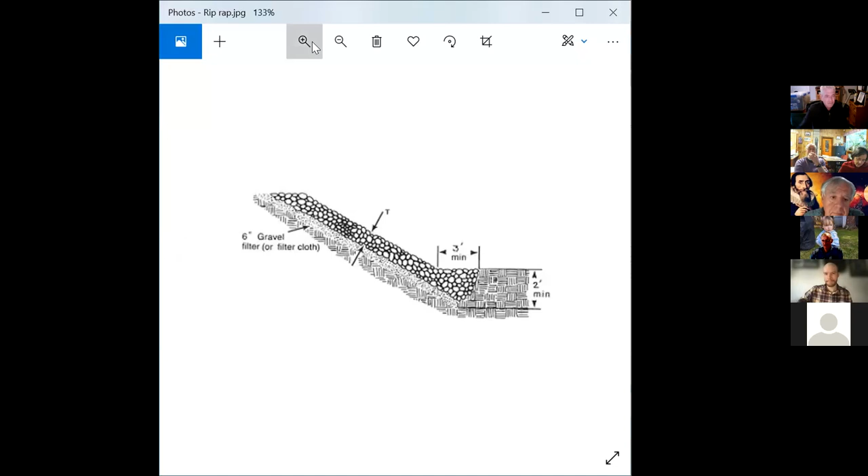No, I'm letting the other person in, but... There you go, there you go, Frank. Frank's in. All righty, thank you. Thank you all, thank you folks.

So if you can see that, and I'm going to make my screen bigger. So I went through, there's a bunch of different standard details for riprap slopes.

Again, some of the details vary, but typically you've got your soil, the little crosshatch. Then there's often a filter fabric or geotextile fabric to make sure that the fine material behind it doesn't erode out and undermine the riprap. You usually put in some kind of gravel or crushed stone, and then you have the riprap. Again, there is an embedment here, and this detail shows 2 feet and a little bit of flat area.

The system that was built was basically just laid upon the slope, ties into the existing grade down at the bottom, so it's not embedded at all. And there's really nothing behind the stone. It's large stone, but there's nothing behind the large stone to hold things in.

The second item is when I looked at the geo report, they had some nice pictures, and I think there were also some in the notice of intent. There are large holes in that riprap, and the real concern is water, whether it infiltrates down from the top as it's coming from the slope or through the ground, can take that fine material out, and over time the material supporting the rock does not stay in place, and the rocks start falling down.

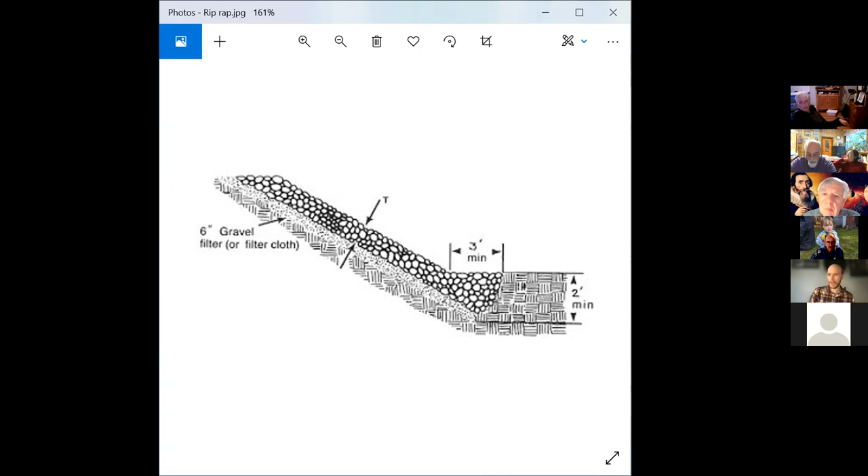Is someone able to share that plan, or could I share it? I'd like to walk through Frank's comments and make sure I understand what's needed here, because that would really help expedite this, and hopefully we can finish in just a few minutes.

Can you let the people in the waiting room in? And you are? Who are you? Mr. Salamander, who are you? No, I don't think I'm going to let Slurp in at this time. I'm going to have to make you the co-host, Mark. All right, okay? I promise not to do anything except share. I got it, we can trust you.

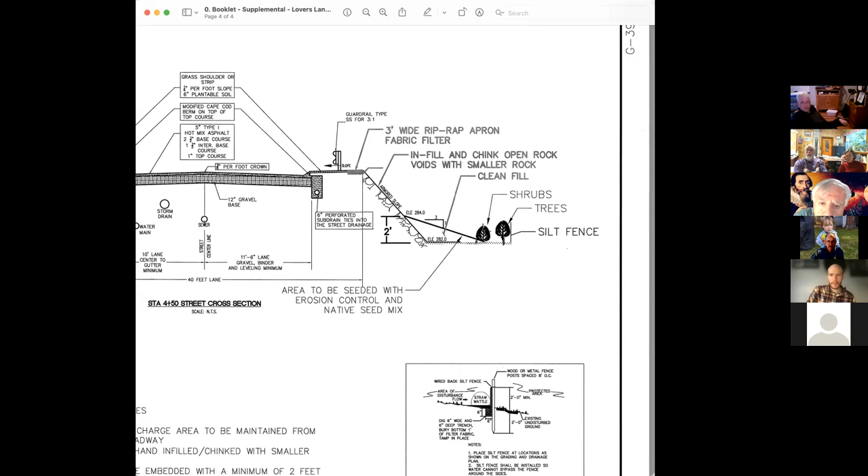So this is the site plan that was submitted to the commission on March 11th. Sorry, let's make this a little bigger. So it's stamped March 4th, 2022.

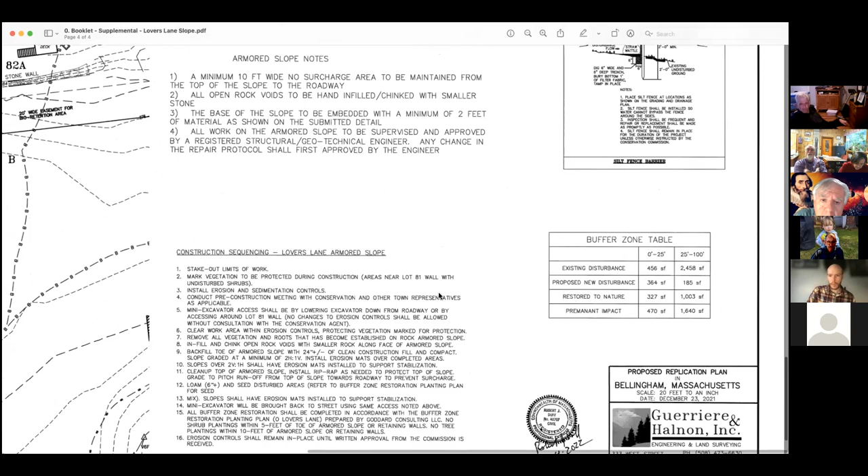The first comment was that there's no fabric behind the slope, which is correct. At least to our knowledge, there isn't any fabric behind the slope. The only way to add fabric behind the slope would be to rebuild it completely. The intention with regards to the voids between the stones was to infill and chink the open rock voids with smaller rocks, packing them in to basically fill them in and prevent them from being void spaces, probably packing them in slightly with a machine so they're nice and tight and fill the void.

We could put fabric behind those packed stones to at least create small areas that have fabric behind them, to create a seal in those areas. But if the concern is that they need fabric behind the entire slope, then the slope would have to be completely rebuilt. If that's what is requested, I can talk with the applicant about how we want to proceed. But I want to be clear about that.

This plan does show embedment of at least 2 feet with a 3-to-1 slope at the bottom. That means the bottom stones will be embedded at least 2 feet. I'm not sure if that's a concern or not, but that's what this detail shows.

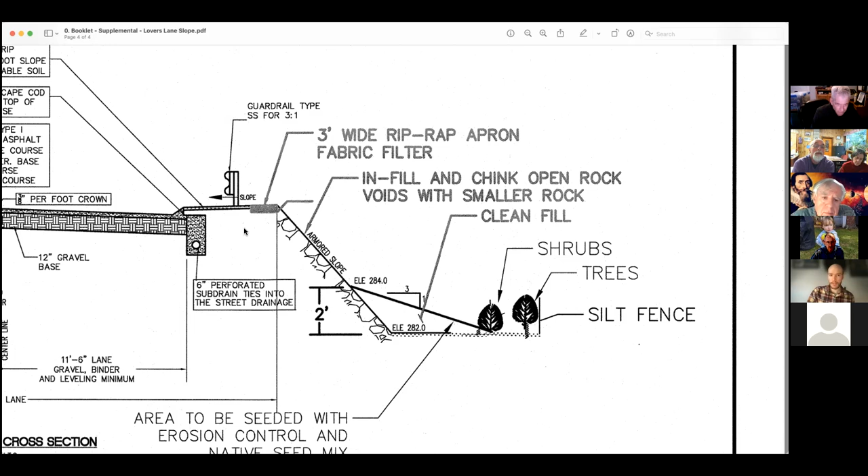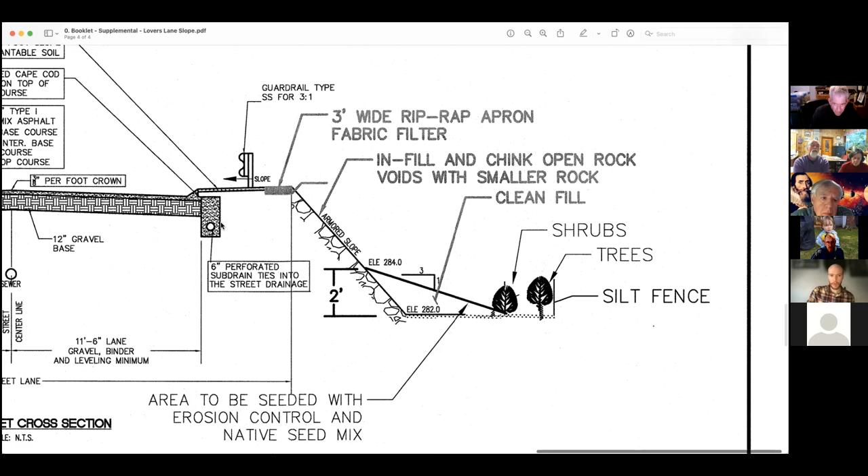So we're talking about that much area of surface water that could percolate down behind the wall. The street does have perforated subdrain tiles planned. If there was a concern about water from rainfall in this area, you could, as Frank noted, do some sort of liner to direct the water away from the wall, maybe into this system, by scooping out a curved section of soil from the stone down to the actual pipe as a liner. That way, all the water would eventually percolate into this system. You could do that, it would at least eliminate some water there. These are on both sides of the street, for underground drainage versus water on the asphalt. Water on the asphalt will go to the catch basin at the end of Lover's Lane because of the curbing.

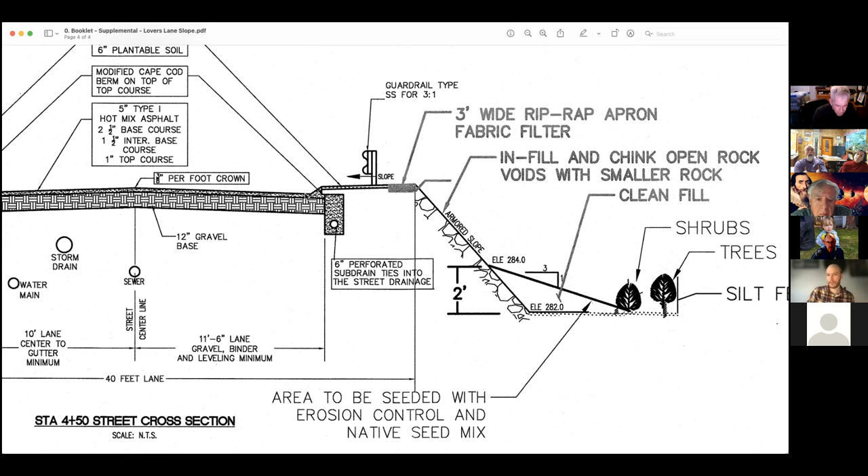On the question of water behind the wall, there's really no possibility to put a pipe underneath or behind this wall unless you rebuild it completely. So with those notes, Frank, could you clarify the concerns? I understand their concerns, and I want to make sure we do something amenable and workable that the town will allow. We're under the town's pleasure with regards to the slope, because the town wants to ensure the slope is stable long term and maintainable. So regarding the fabric, the large stones, the embedment, and the water, could you clarify your thoughts after me walking you through this plan?

Sure, I'll start at the top and work my way down. So one of the details I've seen... Sorry, what I'm wondering—similar to what I was saying—is to excavate behind the wall and create some kind of sump to take surface water and channel it away from the wall.

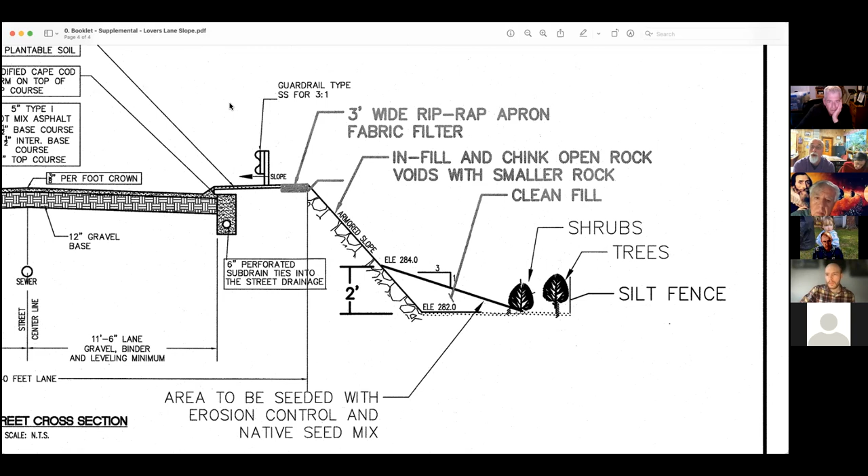So I like the thought process here, but we have two more hearings we need to get to, both continuations, and one's an open and close. So if you'll bear with me, I'd like to continue this for probably another 10 or 15 minutes. Mark, is that okay with you? That's fine, I can wait. Okay, in that case I'll entertain a motion to continue the hearing until after our next two hearings.

There's a Bellingham postal officer named Chris in the waiting room.

So we have a motion and a second. By roll call: Brian, aye. Mike, aye. Neil, aye. Ariane, aye. Okay, by unanimous vote.

I don't know who the postal service person is. Who is Mr. Salamander, please? I would not let any of them in, Cliff. No, I have a problem with people. We already said you need to identify yourself and present your credentials or interests. We don't know who these people are. Appreciate their interest in the Conservation Commission, though—it's amazing, isn't it? Well, maybe it's a big night for the salamanders.

That being the case, we'll move forthwith to the Lincoln properties.

The Bellingham Conservation Commission will hold continuations of public hearings in accordance with the Mass Wetlands Protection Act, General Law Chapter 131, Section 40, and the Bellingham Wetlands Protection Bylaw, on the notice of intent for the proposed roadway mitigation along site frontage entrances to Curtis Apartments as required by Mass DOT, including installation of additional catch basins connecting to the existing system at the easterly end of the site, within the 100-foot buffer zone to bordering vegetated wetlands. The site is located at Assessors Map 51, Parcel 4, 4A, 4B, 6, 8, and at 161, 163, and 167 Mechanic Street, Bellingham. Keith Lincoln of Chapel Engineering, Marlboro, Mass, has submitted the filings on behalf of Rustian Campanelli, 1 Campanelli Drive, Braintree. The continuations will be held on the evening of Wednesday, April 27th at 7:15.

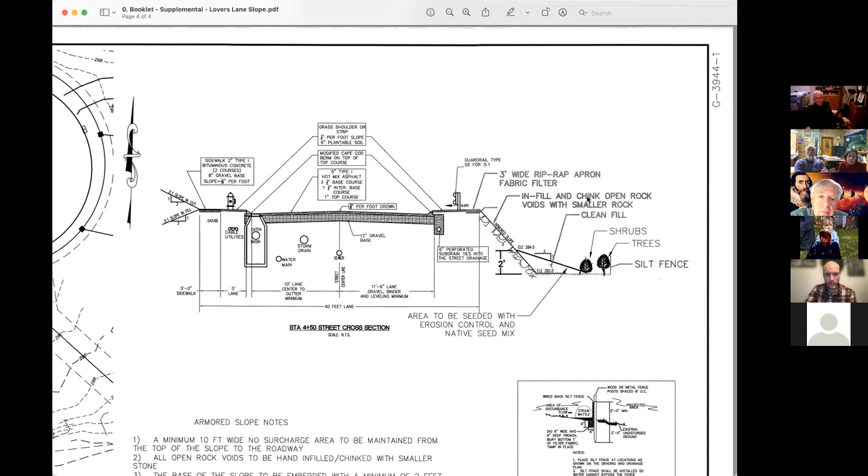If you wouldn't mind, Mark, being able to share the plan you had. I had not seen that plan previously. I don't know why, I hope I sent it. I apologize if I didn't send that out to you. I will check, sometimes things get stuck in the recycle bin or whatever. So I checked it there. The trash bin? I hope it didn't go to the trash bin. I am so sorry, I am that's so sorry.

So I think starting at the top. Junk mail filter, junk mail, thank you. I wish some of my boss's memos, but never mind, I won't go there.

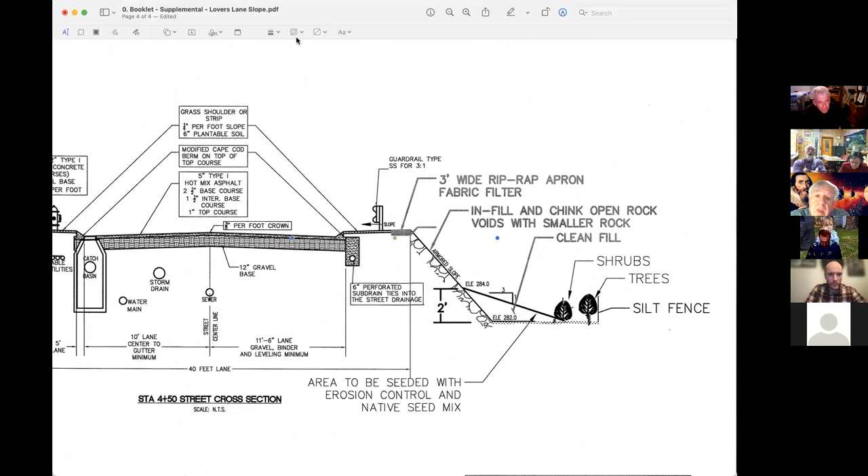Starting from the top down, I like the idea about putting the impermeable barrier across the top. One item that might be a concern, I've seen a couple details like this, wherein you run it maybe 6 inches or so below the surface, and then sort of take it around the pipe system so that water, depending how that drain is set up, it's typically got impermeable, perforated drain, something like that, so that you're basically collecting it and just running it across the surface as much as you can. I think that would be handy.

I'm not really sure how effective sort of cramming some fabric between the holes is going to be. It certainly would help, but I'm not sure that's something that's going to be very effective.

A question I might have on that is, if the rocks were put in, or the riprap was put in relatively tight, that it's being held in by more than just filled in the hole and is loose in there, that would be a little bit helpful, I think. I'm not suggesting that you remove all the riprap and rebuild the wall, to be perfectly honest. You might ask Mr. Martin if there's something that could be injected in there, put in it, that might provide some kind of a limit to water seeping through that. There may not be anything, and I don't know that.

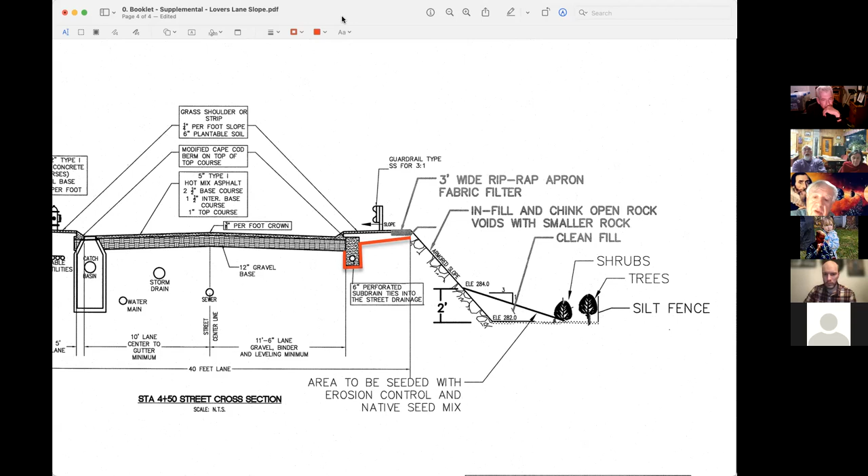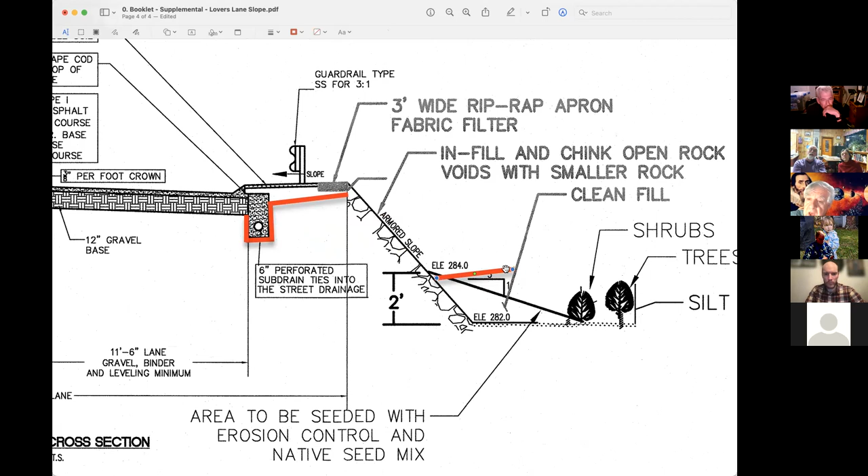The 2-foot sort of berm at the bottom, my question is, maybe some kind of fabric could be put over that, a geofabric or something, that would hold it in place a little bit on the surface and allow the grass to establish itself substantially. My concern is it's going to take a little bit of time for the grass to grow when you put that in there, unless you do hydroseed or something. But anything that might help armor that a little bit, that will allow the grass to go up there, and you'd have essentially an erosion resistant slope.

I understand you're trying to make sure you're not impacting the resource area or the 25-foot no disturb zone in there. The other question I'd have, and I see the plan, I don't know if there was another report from UTS, but would it be possible for UTS to provide the details of what's out there in their report.

This was the December 22nd, 2021 report, excuse me. They talked about how if you do this, it's going to be good. It would be nice if they could provide some information on the stability of what's out there right now. So could we anticipate it's going to fall down in 10 years, or they're saying if we do this stuff, but they're not saying what's out there is suitable.

If they had anything else that might be done - again, it's not applicable here, but I even looked at gabions. A gabion is basically a metal cage wherein you put a bunch of stone. I'm not sure how, if you tried to put a metal fabric over the top of the thing, I'm not sure how that would stay in place or that wouldn't rust away over time. But I guess it would be nice to have them take a look at it.

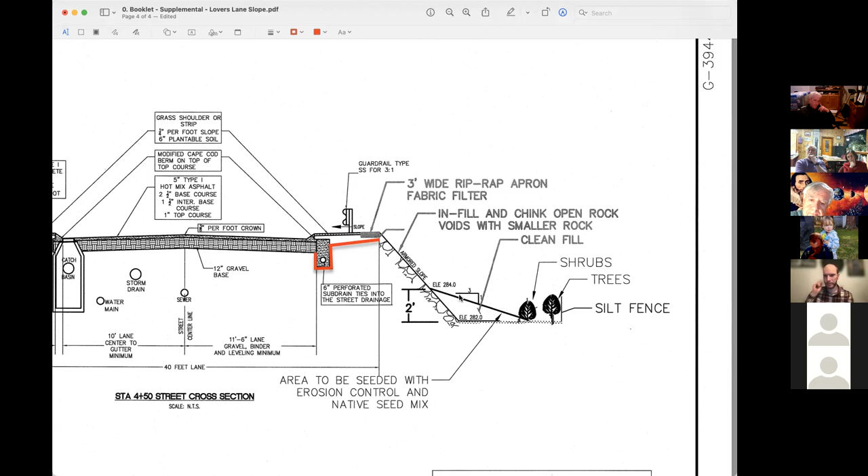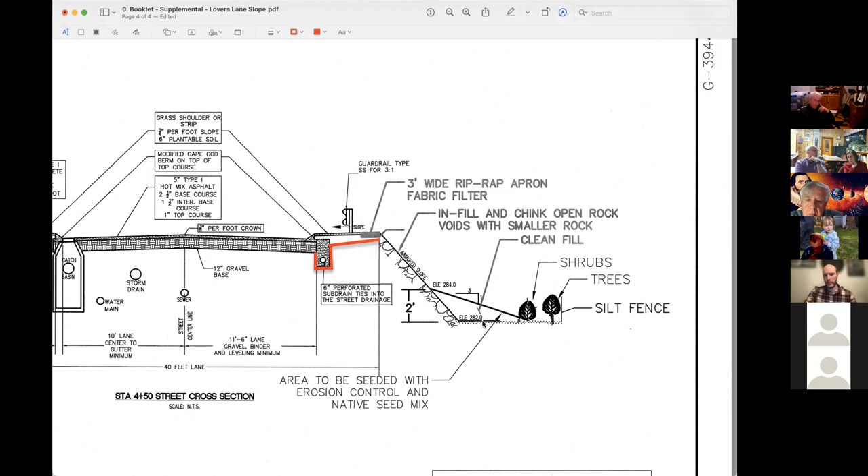Would trees be the best thing to plant there? I mean, shorter vegetation could probably establish erosion control just as well, if not better. I just imagine a tree on a really steep slope falling over. It's a 3-to-1 slope, so it's fairly shallow.

But again, we could just do a bunch of shrubs in a very dense pattern across that slope to help stabilize it, using erosion mats as well, because I think the commission wants 2 years of monitoring on these areas for erosion. So we'll have 2 or 3 years of documentation to prove that it's stable. I think that provides some security on the erosion thing, and the viability of it.

And so if the erosion can be addressed, that's step one. The question again is the long-term erodibility of it. I think, Frank, I'll definitely ask UTS about that, because I think there could be some more creative solutions we could possibly implement, if there's nothing else you want to point us in the right direction on.

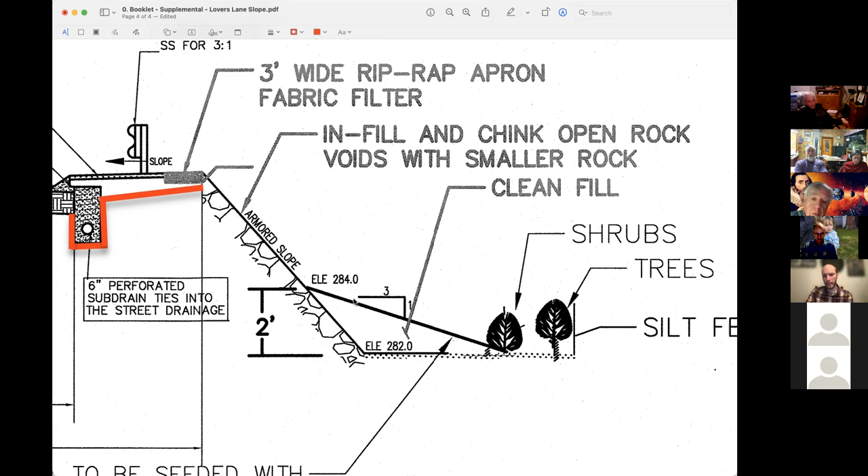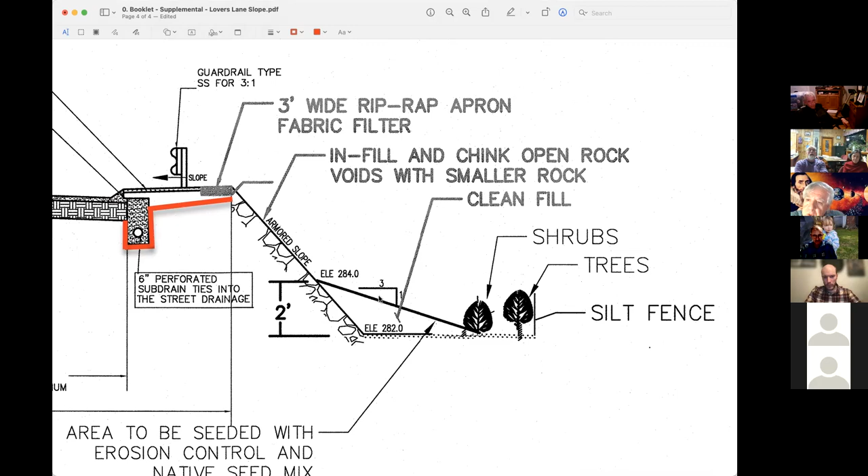I think the only thing about the shrubs, I'd not plant them where you have the riprap slope. I'd end them, say, at the existing toe slope, so you don't have roots going into the riprap stone over a long period of time. So if you can see this red line right here, we'd plant them from this line over to here. Yeah, I think that's fine.

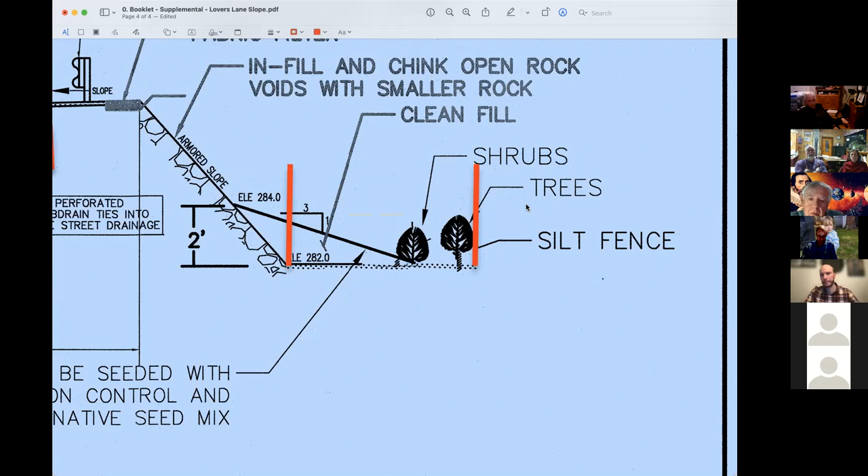Okay, so I think we'll look into adding plantings to densify that, and also look into what else we could do to help reinforce the ground as a whole while still allowing the plantings to thrive. It could be a short-term geogrid that breaks down over time but provides long-term security for the soil while the shrubs get going, maybe 5 to 10 years of geotextile fabric material there while the shrubs get in. Then after 10 years, the trees should be well established to where long-term it should be stable.

So that was very helpful, Frank. I think the other question was the gabion netting. I've seen armored slopes where they just put a metal cage over the slope to prevent things from sliding out. That could be anchored somehow - if the holes are filled with rock, you could cover it and then anchor the mesh into the rock at specific locations to keep it in place. But I don't know if that's what the town really wants there versus something else.

It's not very aesthetically pleasing. No. Yeah, the gabion, you could do like a layer over the existing wall, a leaning gabion wall with metal cages and rocks in between. Then you could put fabric behind that, but it's almost like it's just a covering over what's underneath. And I don't think I would agree with that.

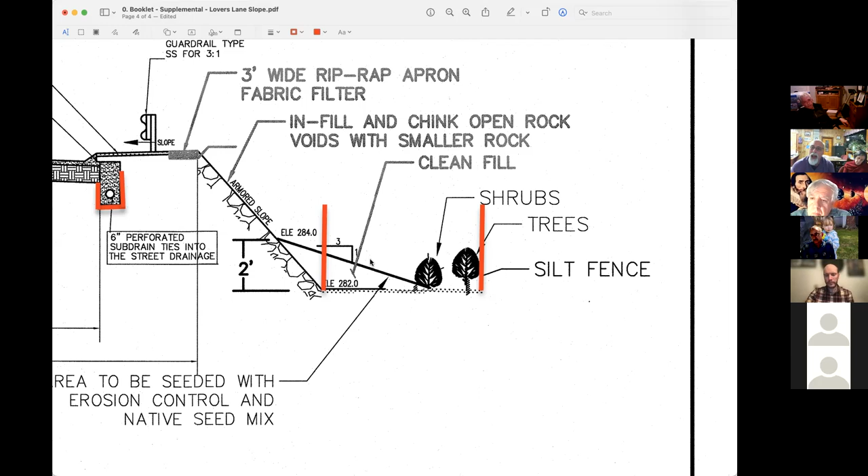Is there anything else, Mr. Chairman, that the commission wants to discuss on this topic? I think Frank and I covered everything. Actually, there was one item on the abutting lot - there was going to be an additional treatment proposed for the wall on the abutting lot. Did we make any progress on that?

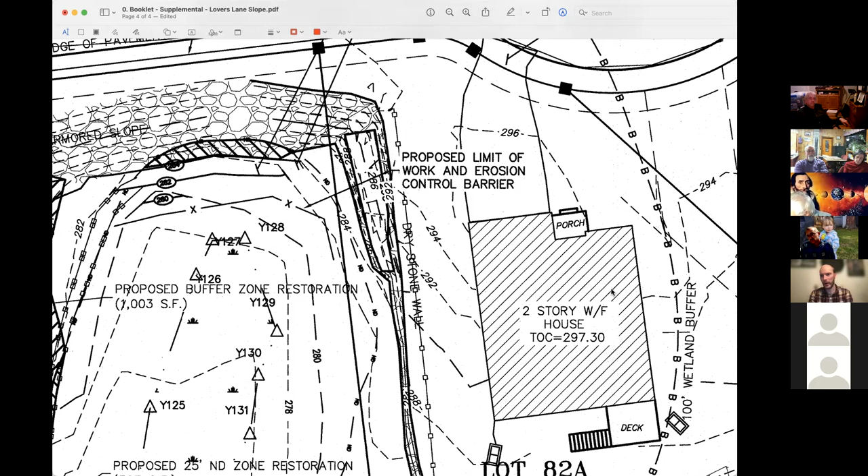Do you mean the stepped wall right here? That's it, yes. So I know there were some plans. I haven't heard about a definitive plan yet, but I will press the applicant to get me that information, because it's something I've been reminding them about, and I haven't heard definitive details. I know they're getting close, but nothing definitive yet. I'll try to get you those - that's lot 82A, and I'll make sure we get that information to you, because it's part of the whole network of walls there.

Yes sir, thank you. And just so you know, I have a draft of the proposal already done, so I can edit it once I have a reference to the latest materials. Perfect, thanks so much, Frank.

Quick question, Mike, for clarification - I can either do a screen share, or if Mark has it right there. It's about the restoration planting plan protocol we have. I just want clarification on two items there. Do you want me to share it, or do you want to bring it up, Mark? I got it here, hold on. Yeah, just be helpful to look at the lines rather than me just saying it. I think it's minor, I hope - just a clarification. No, I understand, I want to make sure we get this right.

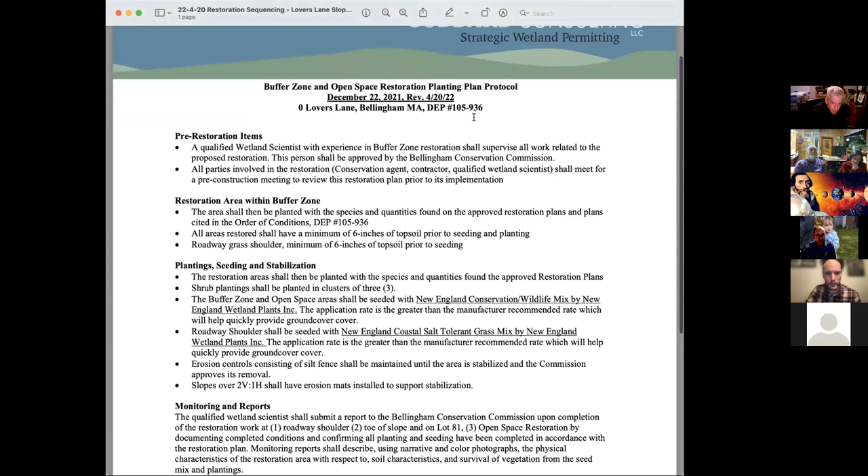So if you scroll down to the planting, seeding, and stabilization section, the third and fourth bullet points - I think what you want to say is that the application rate is to be greater than the manufacturer recommended rate, rather than the way it's phrased, because the way it's phrased doesn't make a whole lot of sense to me. Okay, does everybody see what I'm saying?

Yeah, yep. Is that the intent - that it's to be greater than the manufacturer rate? Yeah, that's the intention, just because we want to make sure we get really dense growth there. We're going to be extra cautious to make sure we don't just go based on what they say, but extra seeding of that type of seed mix never hurts.

Okay, also same thing for the next one down, the roadway shoulder seeding, same issue. And then finally, the next one after that, erosion controls consisting of silt fence to be maintained until the area is stabilized and commission approves its removal. Stabilization is different than restoration, where we get 75% coverage by the end of the second growing season.

What is stabilization going to be defined as for that area? I would say at least 75% vegetative coverage of the soil, which is usually the minimum requirement for success in DEP for replication areas. And that usually means the soils are pretty stabilized. If the commission wants it greater than that, most of the areas we're talking about are going to be vegetated herbaceously fairly quickly.